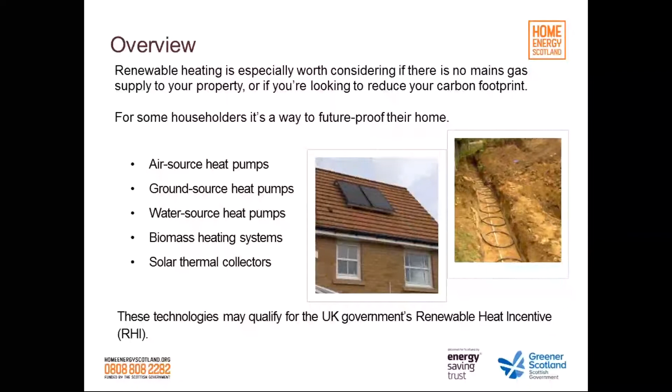There's a line there at the bottom indicating the first mode of financial assistance, which I'll be talking about in a little bit, which is the Renewable Heat Incentive. But I will run through that in a bit more detail. Before I do actually come on to the technologies themselves, I always like to say a quick word on fuel costs, because obviously it's pretty important if fuel bills are a major consideration, that you get this part right.

So on that top line there, you can see straight away that mains gas is still a pretty good bet if you are on the gas grid. On average in the UK right now, it's about 3.8 pence per kilowatt hour. Oil actually is one of our major bugbears right now because it is very cheap, primarily because it quite closely tracks the global price of crude oil.

What I would say on that though, before everyone rushes out to go and buy an oil boiler, is that because it does quite closely track that oil price, historically it has been very volatile. Just a few years ago it was 6.2 pence per kilowatt hour, which places it well above the current price of biomass and even LPG, which is liquefied petroleum gas or camping gas, I suspect, to you and me. So it's one to be careful of.

Electricity right at the end is pretty much the worst case scenario, even if you are on an off-peak Economy 7 or a tariff like Total Control or Comfort Plus. Average consumption for domestic property, that's the lower table there. Between heating and hot water, typically that amounts to between 15,000 and 25,000 kilowatt hours per annum.

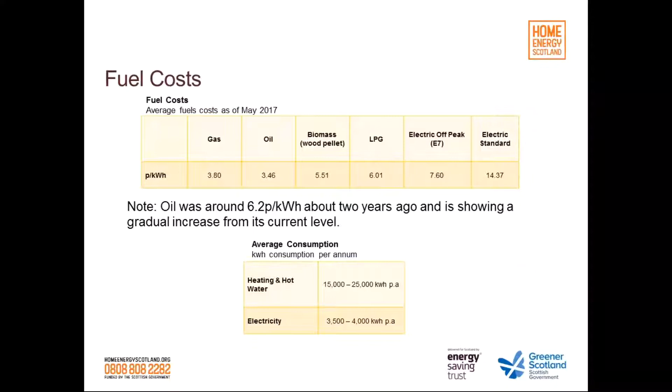On to the technologies then. So the first one I'll discuss is biomass, and I'll aim to not dwell on this too much, as our Green Homes Network member is going to be discussing this in a bit more detail, actually having experience of living with the technology. But in brief, a biomass boiler is a boiler that burns biomass in one of 3 formats usually, either wood pellets, wood chips, or wood logs.

All of the above can potentially get you a system which will qualify for the domestic RHI, with some caveats. For example, a wood-burning stove, in most cases, sadly won't qualify for the RHI if it's powered by logs, but may if it's a pellet-burning stove. But essentially, a biomass boiler functions almost exactly the same way an oil, gas, or LPG boiler would. It's burning that material to give you space heating and hot water.

The real selling point from an environmental point of view is if you ignore the emissions resulting from transportation of the fuel to your premises, the operation of the boiler is essentially carbon neutral, in that the carbon that you release into the atmosphere when you're burning the fuel has, of course, in the first instance, been drawn in from the atmosphere when the tree or whichever unfortunate plant has been torn up to create that fuel was growing in the first place. They are very customizable as well.

If you don't have a great deal of outdoor space, obviously that might generate a few issues in terms of actually storing fuel, but you can get very attractive biomass boilers which are designed to be mounted internally that can sit on a hearth, for example. Other units are designed to be mounted externally, and obviously if you've got a boiler house or your utility space, that can be accommodated as well.

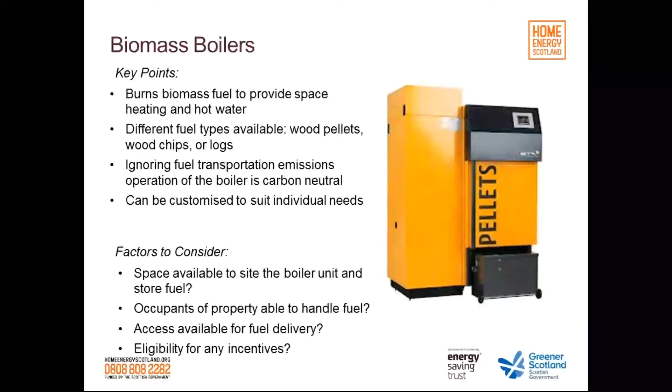Coming on from biomass then, the first of the heat pump technologies is an air source heat pump. I've got a diagram of a Dimplex pump there, and I suspect it will look very familiar to many of you in that it looks very much like an air conditioner, which is because that's essentially what it is. It has an external unit there. That fan draws air through the unit and over a heat exchanger, and there's a compressor which draws thermal energy from that air and dumps it into a system of radiators, again just like a gas or an oil boiler would, for example.

There are air-to-air heat pumps available. Typically they're less efficient. They will still work, but they're also not considered to be a renewable technology, or at least not one that is sufficiently renewable to be worth supporting, so they don't qualify for things like the Home Energy Scotland loan, the renewable heat incentive. The next important point there is the seasonal efficiency. Whereas with biomass, I would say that thinking about the fuel is the most important thing, the most important thing to consider with a heat pump is the efficiency and some factors that are related to that, like for example the flow temperature, which I'll mention in a moment.

A seasonal efficiency of 250 to 350% means that over the course of a year, your heat pump, for every kilowatt hour of electricity that you put in, will be getting between 2.5 to 3.5 kilowatts of useful heat out the other side, which sounds a bit like a perpetual motion machine, but that's just because you're using electricity to run the pump rather than to generate the heat, and the pump is transferring heat from outside to inside. And obviously that external heat is replenished by the sun, which is why this is considered to be a renewable heating technology.

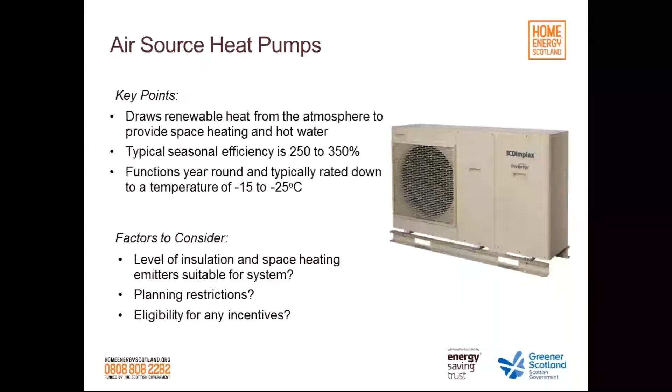At the extreme end of that spectrum, if you're living in an older house, especially if you have single glazing, and if there's drafts, for example, the level of heat loss compared to the type of system that you would require to compensate for that level of heat loss, the size of the radiators overall, may mean that a heat pump isn't practical for your house. But that's just something that has to be considered along the way, and it's actually something that we can help you out with. And I'll go into a bit more detail on that shortly.

Moving on then, a cousin of the air source heat pump would be either a ground or water source heat pump. It's doing exactly the same thing. It's using a compressor to draw heat from a heat exchanger. But in this case, instead of being embedded in that external unit, the heat exchanger is a length, usually just high density polyethylene pipe, buried in the ground, which can either be in a trench, typically 1.5 to 2 meters deep, or of course in a water source. That could be a river, it could be a pond, it could even be the sea.

Typically these will deliver higher efficiencies than an air source heat pump, and primarily that's because the temperature of the ground is much more predictable through the year than the temperature of the atmosphere. It doesn't really vary in winter actually once you get past 1.5 meters or so.

A common misconception is that this is a form of geothermal heating, and I would say it is to a very small degree, but the majority of the heat that you will be picking up is actually solar energy that is stored in the ground, largely in the moisture content of the soil, and that's an important point to cover. But I'll run through those points that I've got down there in order.

So the first thing to consider, do you have the space in your property, or again in a sort of boiler house setup or utility space, to site the unit and the plant equipment? The ground source heat pump unit itself is about the size of a small fridge freezer. You will also need a buffer tank, your hot water cylinder, and a brine vessel, and pipe work to connect all of those. That's a considerable amount of plant equipment, so it's not something that you can hide away in a kitchen.

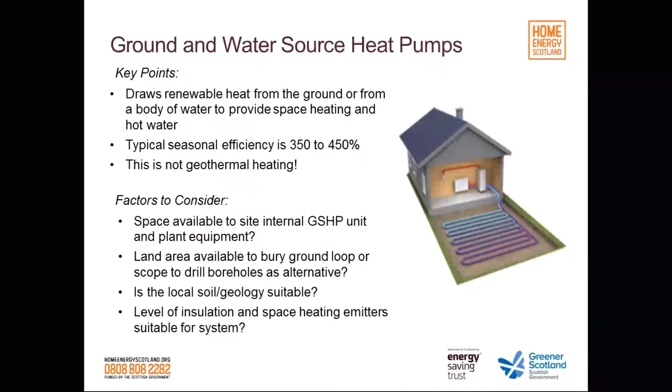So you do still need to be thinking about, what's the level of insulation in my property? Is it sufficient? Are there ways that I can upgrade that, for example? And do I have the scope to make my space heating emitters suitable for the system? Can I install oversized radiators? Or can I install underfloor heating? Which rather covers heat pumps, I think.

So on to solar thermal. Unlike the others, I should stress, solar thermal, alas, again largely because we are in Scotland where the sun doesn't shine a great deal in winter, this is not going to be something that's going to provide central heating to you. But where it excels is in reducing the amount of fuel that your main heating system has to consume to provide you with your hot water needs over the course of a year.

You can see the third bullet point at the top there. We would advise that correctly sized and sited, a solar thermal system in Scotland should be able to provide you with about 50% of your annual hot water demand. What do I mean by correctly sized and sited? Ideally, you want a south-facing roof, pointed as close to being pointed at the sun as it possibly can be. About 35 degrees is usually a pretty good compromise, which is a common angle for roofs. And about a metre squared or a bit more worth of collector for every occupant of the property. So if you're a family of 4, maybe a collector of about 4.5 square metres in size.

It really is a very simple technology. All you've got is the roof-mounted collector. You will have seen flat plate style collectors around, I suspect, and not have even noticed what they are. They typically look a bit like a black skylight if you're walking by. Or there's the other type, which is evacuated tubes, which is actually what the diagram on the right of your screen is. Both are doing exactly the same thing. They're just collecting heat from the sun and from the ambient temperature of the air.

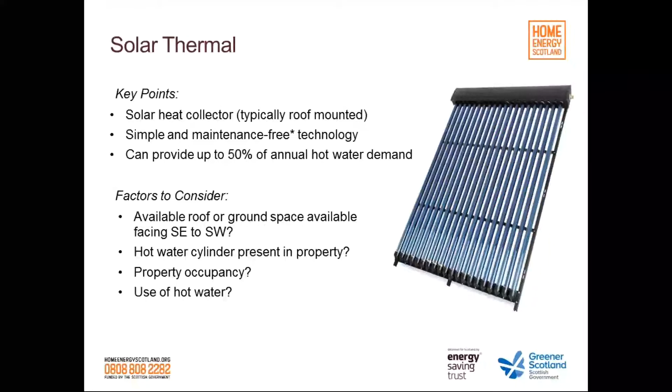If your showers are electric, if you don't take baths very often, you might find that your use of hot water from your hot water cylinder is actually pretty minuscule, which means that the actual benefit to yourself from putting in a solar thermal collector would be fairly minimal. If, on the other hand, you're a family that takes baths or has a mixer shower, if you do dishes by hand using hot water from the tank, or if you have appliances that take a hot fill from the tank rather than a cold fill, then a solar thermal system may well be very, very beneficial.

The last thing I wanted to cover here, before I move on more to the financial assistance that's available, would be heat batteries. These are pretty new on the market, and the main disadvantage right now is high cost and, well, I wouldn't say reliability, because we've got no indication that they are going to be especially unreliable. But what I'm saying is that these batteries have not been around long enough for us to reliably tell you that they will last over the longer term.

But in brief, they use a salt-based solution called a phase change material. If you've ever got one of those hand warmers at a fair, which you click, usually a metal disc in it, and then it kind of crystallizes and heats up, it's exactly the same stuff. And that's pretty much it. The batteries themselves are usually comprised of various cells. These cells can then be manipulated to release their heat when it's required.

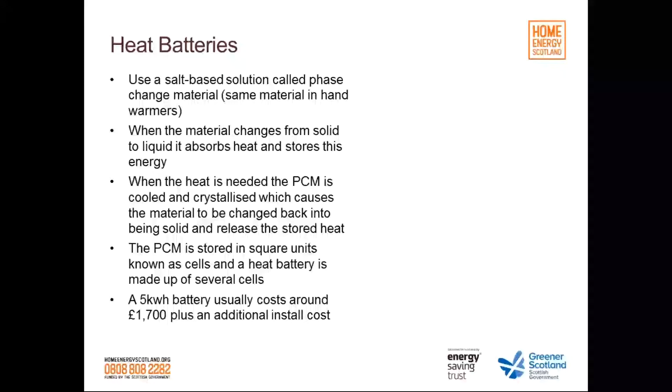This, I suppose, would be a good solution if you, for example, live in a house where you have an off-peak tariff and you want to take advantage of the nighttime rate for electricity. Again, I'd say it's worth considering carefully, because the install cost can be relatively high, so you might be looking at a fairly long repayment time. Although every indication that we have, based on the tests coming out of the industry, is that the batteries should last this amount of time. But again, that's not an assurance that we can provide to you directly. But suffice to say, the technology is out there.

So onto the financial support that's available. Upfront support available to owner-occupiers in Scotland would be through the Home Energy Scotland loan. That's an interest-free loan. It's up to £35,500 in theory per property, and that's for renewables and energy efficiency. And when I say in theory, you'll see what I mean on the next slide,

with up to a maximum of £17,500 for renewables. It is 100% funded by the Scottish Government, and it is interest-free, meaning that if you want to, you can pay it off either in whole or in part at any time. And the main reason for it is that, obviously, the Scottish Government's looking to support these renewable technologies into the market. So the idea is to help to take a bit of the sting out of the upfront costs.

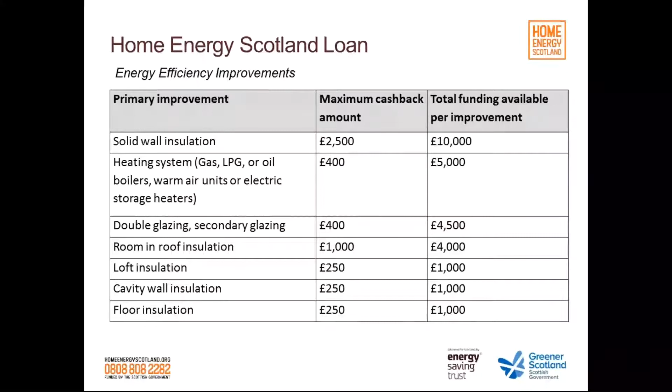The loan's subdivided per measure, so how much you can access depends on which measures you're going to consider. Solid wall insulation up there, for example, get up to £10,000 as an interest-free loan, with up to £2,500 as a grant. Grant funding sadly isn't available for renewable measures, but it is included with energy efficiency. If, for example, your quote for solid wall insulation in your house was £8,000, the grant funding is limited to 25% of your quote, so it would be a £6,000 interest-free loan and £2,000 grant that you would get in that scenario.

The renewable technologies that we're discussing today, solar thermal on its own can be up to £5,000 interest-free loan. I can mention there the family of 4.5 square metre collector. That's probably going to cost you somewhere between £4,000 and £5,000, I would suspect. So that could well cover up to 100% of the install cost. And then any of the renewable heating technologies that we've discussed that can provide both space heating and hot water, the air source heat pumps, ground source or water source heat pumps, and biomass boilers can access up to £10,000.

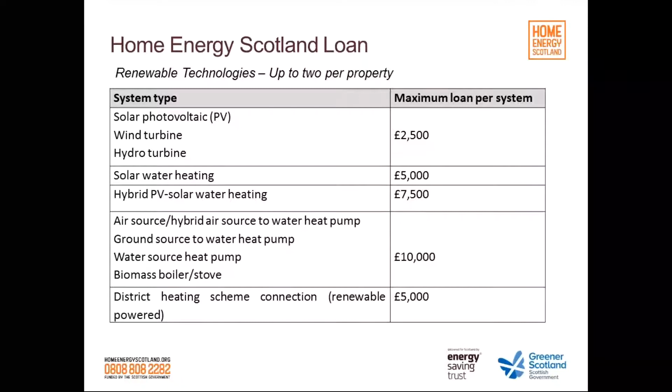The potential repayment period on that is dependent on exactly how much you borrow. Anything over £10,000 would be up to 12 years. Between 5 and 10,000 would be up to 10 years, and less than 5,000 would be up to 5 years. So that's the Home Energy Scotland loan.

The ongoing support that would potentially be available to you would be through the UK-wide Renewable Heat Incentive. This is a fixed rate incentive which is paid to you by Ofgem on a quarterly basis. It is UK-wide, and it's available for all of the kind of technologies that we discussed there, with the exception of the heat batteries. It's paid typically based on the space heating demand of your house, which is a value taken from an energy performance certificate. So this isn't dependent on exactly for how long you run your heating system.

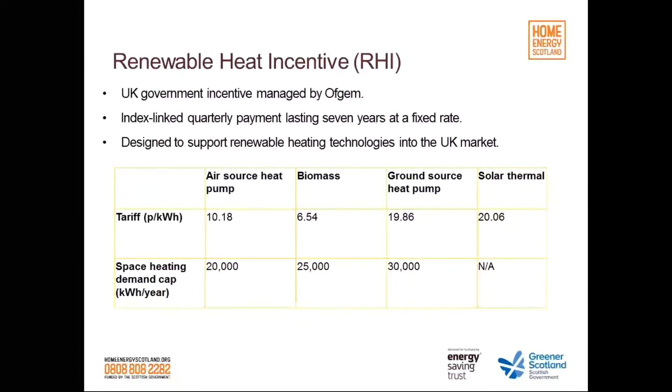On your EPC, there will be a value for space and water heating in kilowatt hours per year. That value is then taken and multiplied by the tariff rate for the technology. For biomass, for example, 6.54 pence per kilowatt hour, and that calculation then gives you what your annual payment would be, multiplied by the 7 years would be your total income from that incentive. There are a few requirements on here, the main one being the same as it would be with the Home Energy Scotland loan, which is that your installer and the technology that they're putting in must be Microgeneration Certification Scheme accredited, but that's something that we can advise on.

The further support that would be available through ourselves, in the main to owner occupiers in Scotland, would be through our home visit service. This is free and impartial. It's funded fully by the Scottish Government. Again, it's designed to assist householders in Scotland and to assist these renewable heating technologies into the Scottish market. We'll give advice on insulation, heating and renewable technologies, and the idea is very much to provide a bespoke service that will give you a roadmap and that will give you advice that is specific to your circumstances.

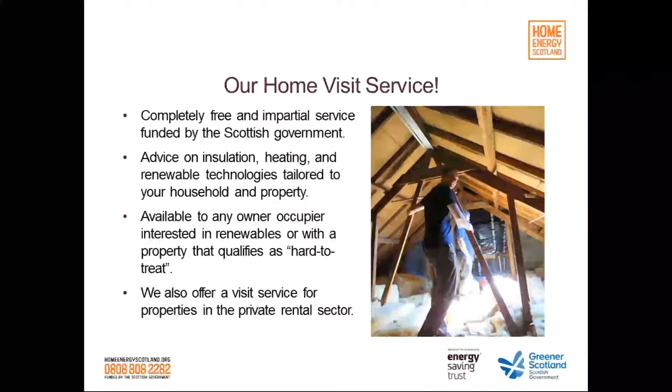It's open to any owner occupier in Scotland who's interested in renewables or who occupies a property that would be classed as hard to treat. Hard to treat is anything with a solid wall. The majority of these are historic properties, and also any property that is not on the mains gas network. There is also an equivalent service for landlords and for tenants in properties that are in the private rental sector.

The second to last thing I'll discuss quickly is the Green Homes Network. Your next speaker is a member of the Green Homes Network. Essentially what this is, is a database of householders who have already gone through this journey. They've already put in a renewable heating technology or an electricity generating technology like solar PV or a wind turbine. And they're there so that you can learn from their experience.

The network's built around case studies. That's online case studies where you can read about someone's experience, but frequently members of the network are open to having conversations arranged, either phone or email, or having visits to their houses, and some have even been known to help us out by co-presenting a webinar.

The last resource that I'm going to talk about quickly before I pass you back over to my colleague Joe is the Renewable Installer Finder. This is hosted on the Energy Saving Trust website, and it's essentially a market comparison tool. What makes it particularly useful, however, is it's Scottish Government supported, and in the past the Scottish Government has made it a condition of using the interest-free loan for renewables that you must leave feedback for your installer on this tool. So you can see very quickly by a quick glance at a company's profile what kind of reputation they've got and what previous customers are saying about them.

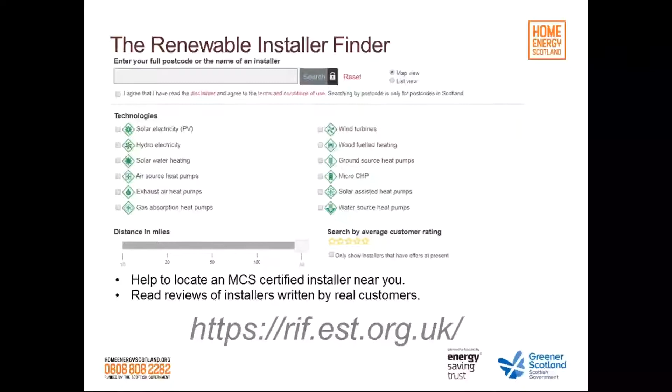All you do is pop in your postcode, tick the boxes for the technologies that you're interested in, and it will give you a list of phone numbers which you can then use to get all the quotes you need to make an informed choice. Also goes without saying, all the installers on that tool there are MCS certified. As I mentioned, that's the requirement for any installation joining the RHI or applying for the Home Energy Scotland loan.

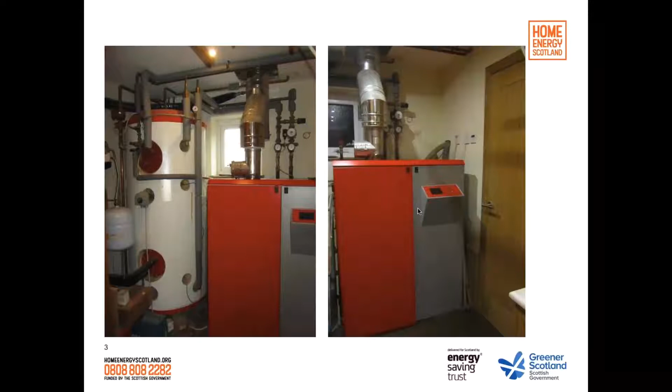We were sort of discouraged from the idea of using a log type of boiler, because at that time they were very much requiring you to be able to feed it every few hours, and certainly you wouldn't be able to leave it for a few days and still have heating when you came back. But that's when we were told about the wood pellet boiler that we'd never heard of before, and we were put in touch with the company that actually ultimately installed our boiler.

So this is the boiler. The photograph on the right-hand side shows the boiler with a door beside it, and that door is relevant in that that's the access to our pellet store, which is therefore very close to the boiler itself. As for the boiler, behind the grey door is the pellet hopper that is filled on a daily basis with pellets. And then in the left-hand picture, you'll see that beside the boiler is a very large water tank with some quite complicated pipework coming out of it.

So the boiler was installed for a few months. We were manually filling it with sacks of pellets, 25 kilogram sacks on the whole. And that worked fine, but there were a few drawbacks to manually filling the hopper, particularly if you forgot to fill it. Then the next morning you found you had no hot water. It's also more costly than the bulk deliveries of pellets. And thirdly, you end up with a lot of plastic sacks that you need to dispose of, and that again was something that concerned us.

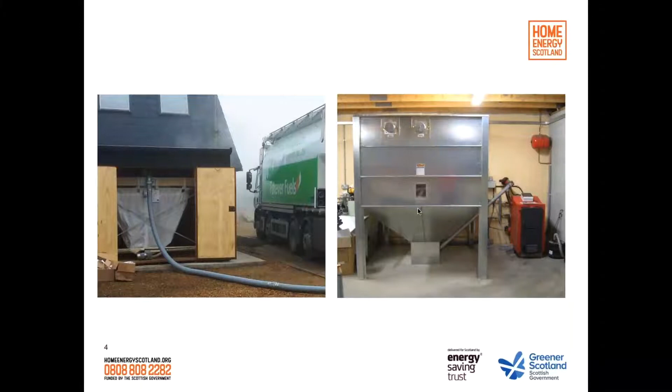So eventually we did have our pellet store ready, and since then we've been getting bulk deliveries of pellets once every 10 to 11 months, and that costs us about £800 per delivery. The pellet store is relevant because it's quite a significant part of the whole system, and you can have a number of different styles of pellet stores. There's a couple of stores here. One is just a big sack, and the other is the equivalent of a sack, but it's made of metal. But either way, the pellets are delivered into the top of the sack, and then they're taken out directly to the boiler from the bottom.

The important things to remember with the pellet store is that it has to be fire and damp proof. It needs to be accessible. As Kenny said, you have to be sure that the delivery lorry can actually get to it. So that's a little bit challenging because we're on a narrow road, but the lorry drivers are very good. And you need to construct it in such a way that when the pellets are delivered, it causes the minimum of damage to the pellets themselves so that they don't all turn to sawdust.

And lastly, you want your store to be big enough to take a minimum volume delivery. In our case, it's 4 tons. I think that's probably the standard minimum delivery volume. And you also have to have space to have some remaining pellets so that you don't run out while you're waiting for your delivery, and also room for the actual auger and slide and slanting floor.

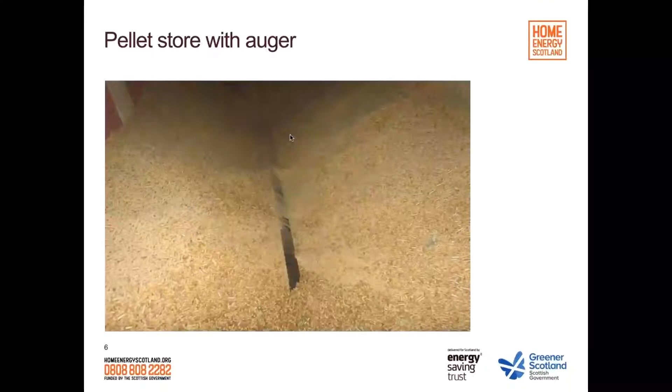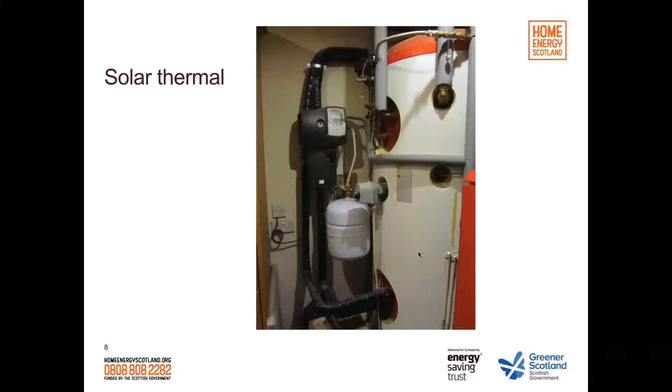A couple of years after we'd installed the boiler, we then looked into solar thermal, and this is the solar thermal system attached to our buffer tank. This is a control panel. It's attached to a thermometer both in the buffer tank and in the solar panel. And we were just very glad that we installed that before we'd finished all the work on the house, because the pipes for that had to be delivered through the ceiling and down the wall of an as yet, thankfully unfinished, bedroom.

So I've just put this picture up really to speak a little bit about the pipe work. Kenny's already mentioned heat exchange pipes and this, that, and the next thing. This particular system actually has 4 pairs of pipes. 2 of those pairs are delivering hot water to the buffer tank to heat up the water in this buffer tank. And then 2 pairs are actually taking hot water out of it, and therefore obviously cold water is going

into it. So you've got water coming from the boiler, you've got water coming from the solar panel that's heating the buffer water, and you've got water going to your hot taps and to your showers, and you've got hot water going to the central heating system. And that's how you end up with a very complex looking piping system.

I just wanted to finish by mentioning some of the lessons that we've learned, because some of it we've learned as we've gone along, and we're just glad, as I said earlier, that we'd had the time to think things through before we just ploughed on, potentially making some decisions in too much of a hurry. But first of all, we're very happy with the pellet boiler, and we've never regretted installing it. It's very robust and it's not caused us any trouble at all.

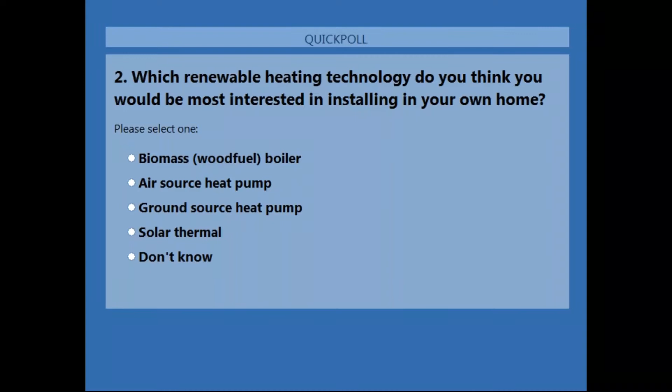So quickly, just going to do one more little poll question, and it's just the same question again, just to see if that's changed anyone's minds. So it should just be appearing on your screen just now, hopefully. Just to get an idea of what people are thinking now. You've heard from Kenny and Rebecca. And, oh, still getting some responses. Quite a high response rate, thank you for taking part. Okay, I'm going to close that now.

And actually, we've got significantly more people interested in biomass since we started. So that's maybe to do with hearing about Rebecca's experiences. Still quite a big interest in air source and ground source heat pumps, and slightly fewer responses for don't know. So that's quite positive. Starting to get an idea of what you'd like to do.